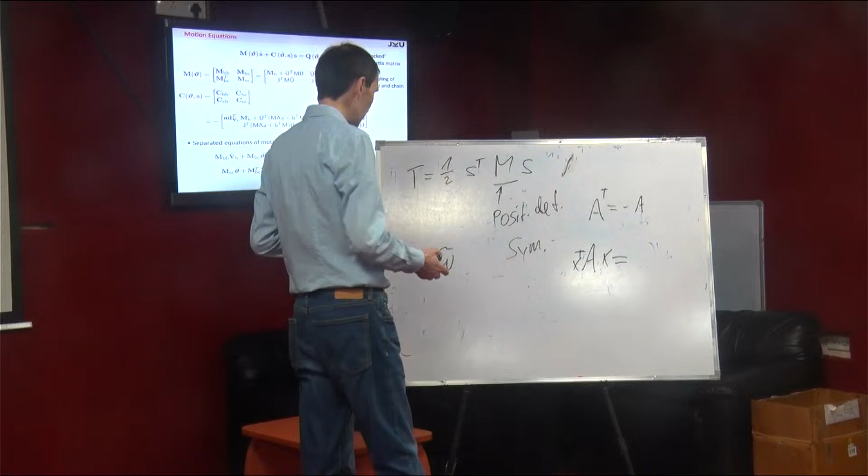Just to follow up: a special case, when we have this omega tilde, we said this is a skew symmetric matrix that we construct from omega. Anyway, the skew symmetric matrix. What do you know if you multiply this with X and X transpose from the left? Just as an example, like this 3x3 example, 3-dimensional example. What do you know, what is this? It's the cross product of omega and X, right, this is what you said.

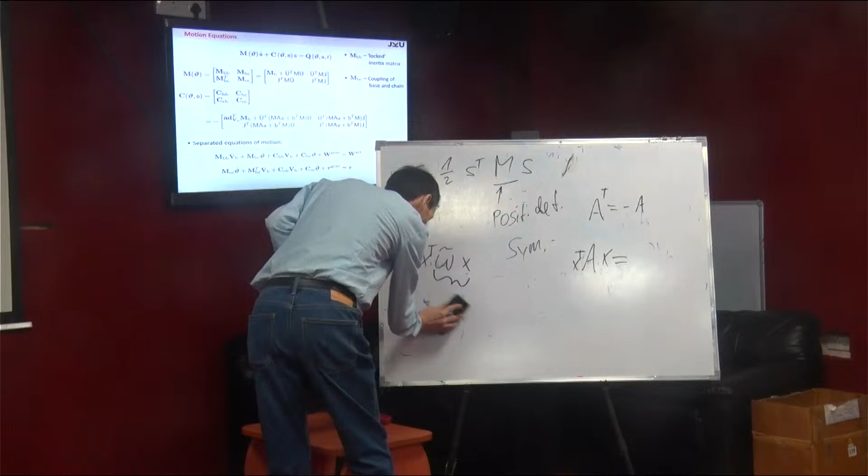Now, if this is the cross product of X... I shouldn't have used X actually. So X cross X, oh sorry, omega cross X, this is how you did it before. And now you take the scalar product of this with X. What do you get? So you take any vector, cross product with X, and then you multiply what comes out with X.

That is certainly a scalar, that's right, it's a scalar product. You take a vector omega, cross product X, what comes out is, of course, a vector which is orthogonal to X. And now, what's then about the scalar product? So you multiply a vector that is orthogonal to X with X. Correct, it's 0. So that's just a special case, and you can show, just write it out, just make an example, and you'll see that whenever A is, for example, skew symmetric, this is identically 0, always. And that's why this shouldn't be 0, shouldn't be skew symmetric.

Okay, this is where we left. I think this is where we stopped. No, where did we stop? I don't know, somewhere. Yeah, that's where we stopped. So the question with the coupling, is it answered?

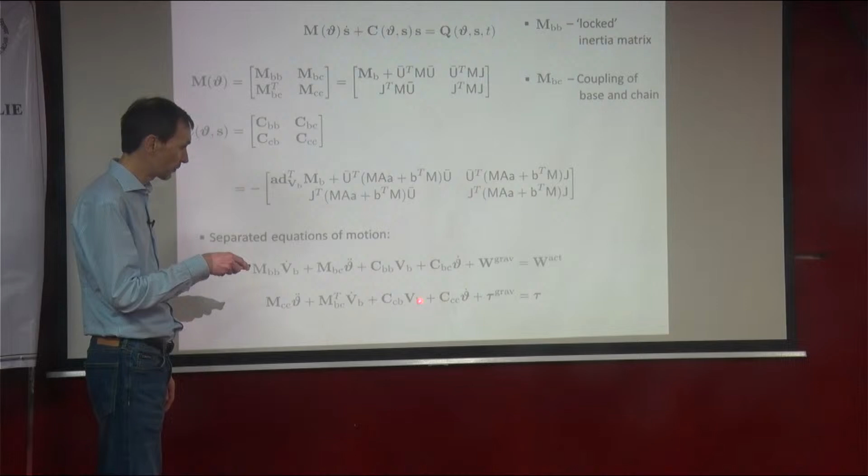Exactly, and you see this, maybe. Again, if you say the special case, the base is not moving, so this is 0, this is 0. And the only thing left is this term and this term. And this is exactly the motion equations of the kinematic chain when it's not moving.

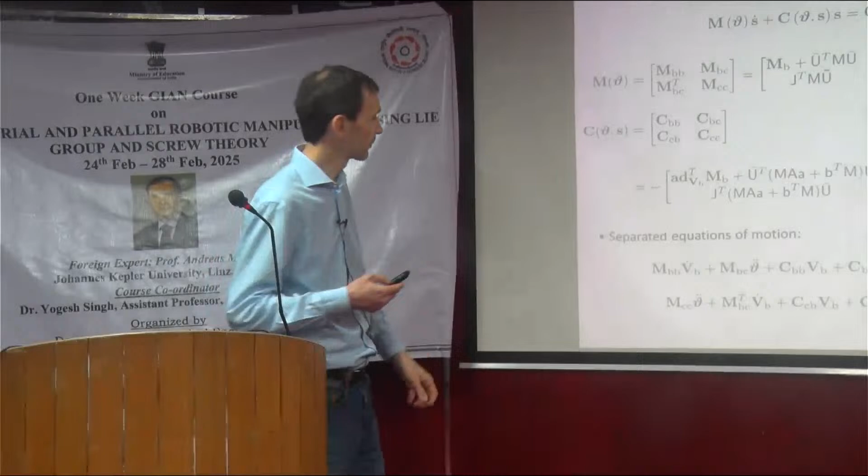How do you measure all these parameters physically? Which one? All of the measurements are calculated mathematically.

Yeah, that's a good point. I would like to show you some examples, maybe in the afternoon.

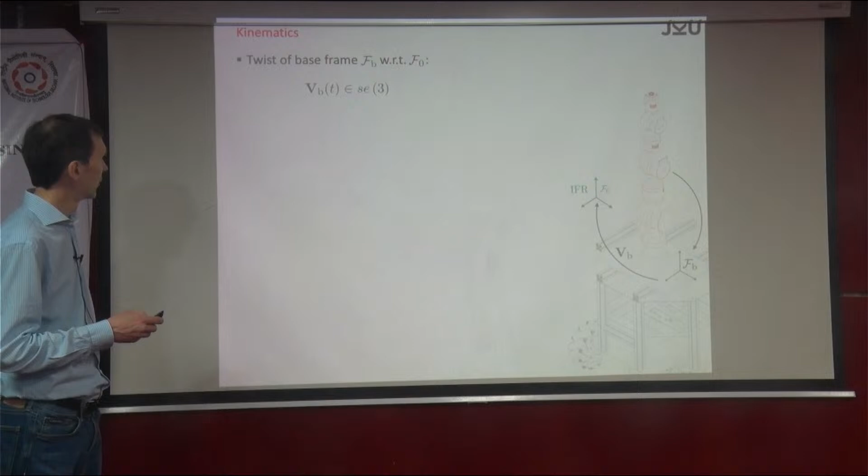So the question was, how do we measure this physically? So the question is, what do you mean by measuring? Maybe just to repeat again, what goes into the equation? No, I'm lost actually, I'm not sure. I don't know, somewhere. So what goes into the equation?

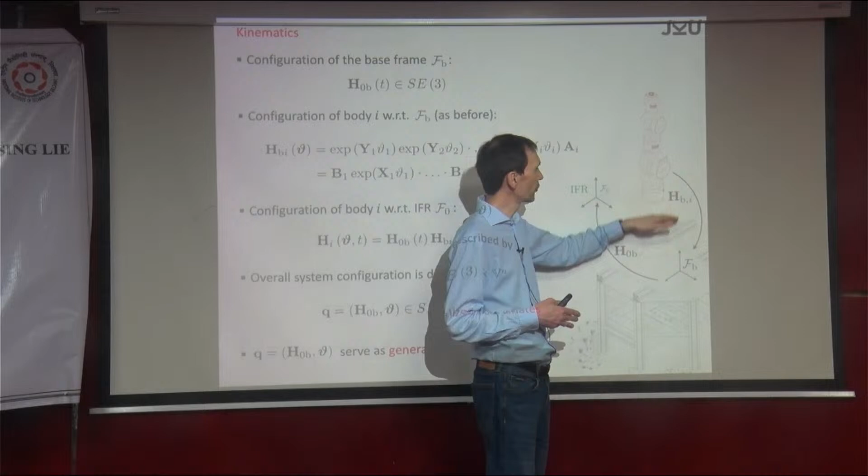Maybe start from the kinematics. What do you have to do? You have to, first of all, find the screw coordinates of the joints. This is easy to do because you just need to measure the vectors of the joint axis, and that's it. This goes into x, or y, depending what you want to do. So that's the kinematics, that's kind of easily done, really easily done.

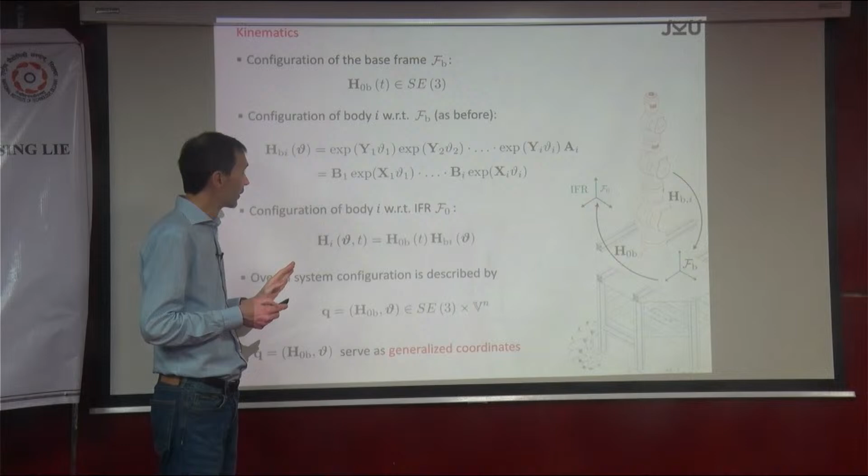So what's next? Dynamics. For the dynamics, where's dynamics, you need the mass matrices, and this is what we did yesterday. So the mass matrices, you need the mass of each body, and you need the moments of inertia, which is the inertia tensor, theta, we call it, or sometimes we call it J or I. And that's it. Of course you have to find this from, I don't know where.

You have to compute this. I mean, you have your links of your system, and then you have to identify the mass parameters and the inertia moments. If you have a CAD system, then you get it from a CAD system. Otherwise, that's always the thing. When you have a body and you have your links, you have to somehow measure them. And this is what you meant?

No. Yeah, so this is it. By the way, there are methods for identification of dynamic parameters, right? What would be a good idea to identify, or what could you imagine how to identify, for example?

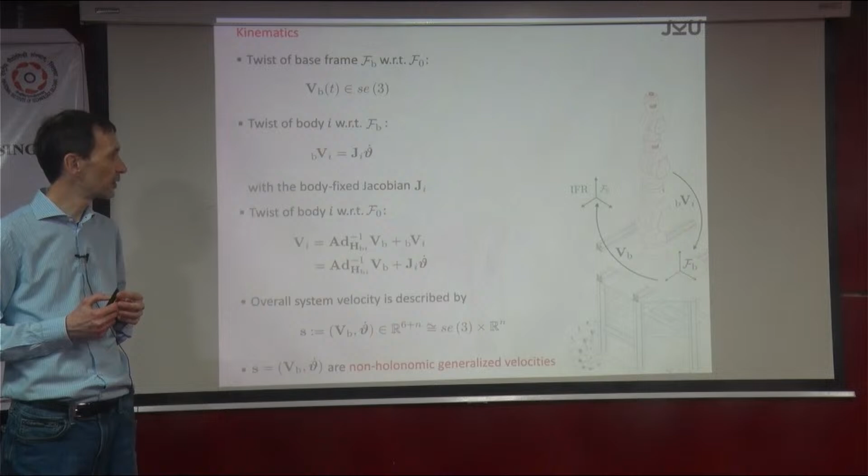I would like to know the mass and inertia of the links. So let's say you buy your robot, right, and you cannot disassemble it and weigh it, so that's not possible. But I still want to identify those parameters. How could you possibly do this?

So good point, what can you measure actually? Dimension, yeah. No, you have your control system. You have your robot, and you can do motion planning, right? You say go from there to there, and somehow it does it. So from your control system, what quantities can you access? The speed, the rotation angles, the speed of your joints. What else?

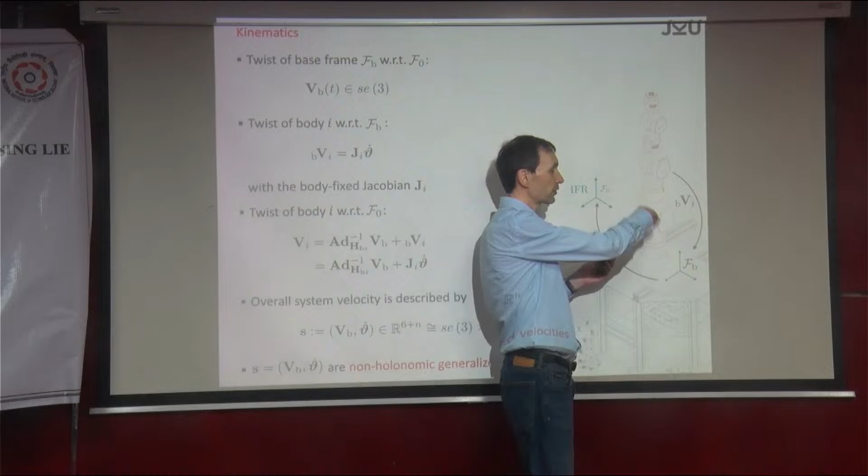Yeah, and that's the thing. It's not always easy to get, but you get the torque. What you most of the time really get is the current, the motor current, and that is somehow related, usually linearly by some motor constant or whatever, to the torque. So let's assume, and that is the case for most robots, that you can measure the torque. When I say the torque, I mean the drive torque. So you actuate your rods, and then you get it. Now intuitively it should be clear that the torque you need to move the system has to do with the mass and so on.

And now there is a whole business about this dynamic identification, in a sense that you generate trajectories that are called persistent excitation trajectories. Because what you want to do, you want to see.

To see, in a sense, you want to feel in your motor current the effect of the inertia, right? I mean, simply saying that, I don't know, look at the last one.

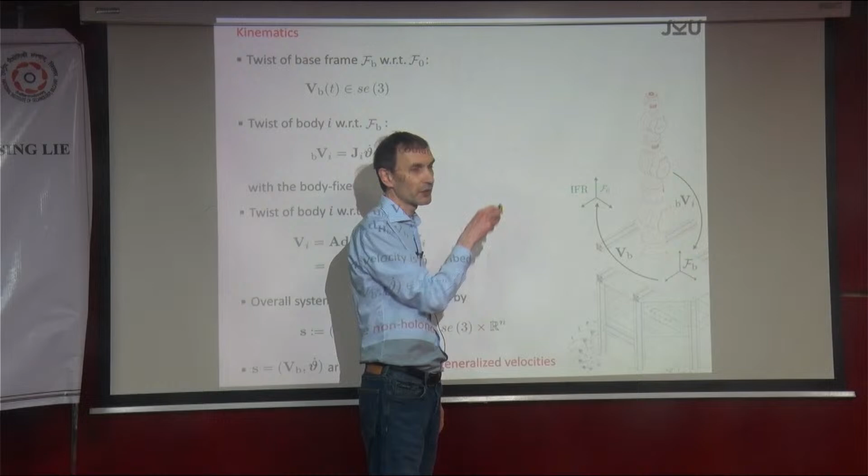So the last one, let's say you are rotating about this axis, and only the last one. What you're probably able to get is the mass and inertia, and maybe even the center of mass of the last link, because if you're turning here, the torque you need is certainly related to the mass and inertia of this last link. Now if you do the same for this one, or this one, then it's a mixture, because you have the effect of that inertia, this inertia, and this inertia.

But you can do this in a very nice way by using a linear regression to identify all this. There's lots of work on this, but it's actually not too difficult to do.

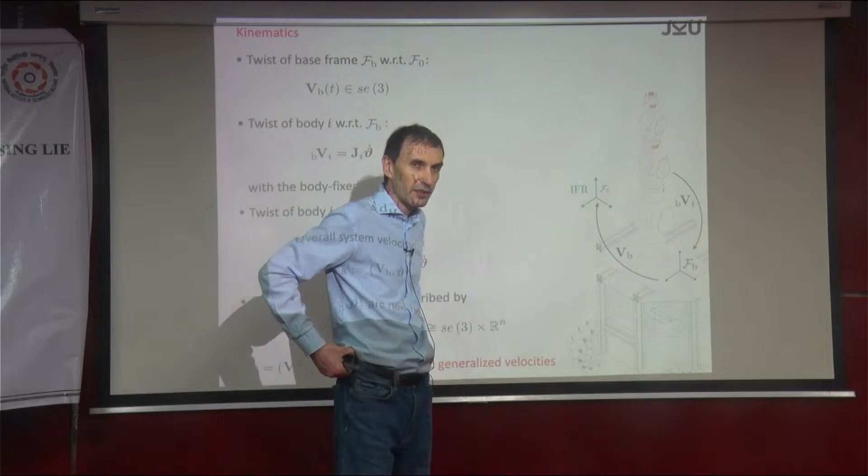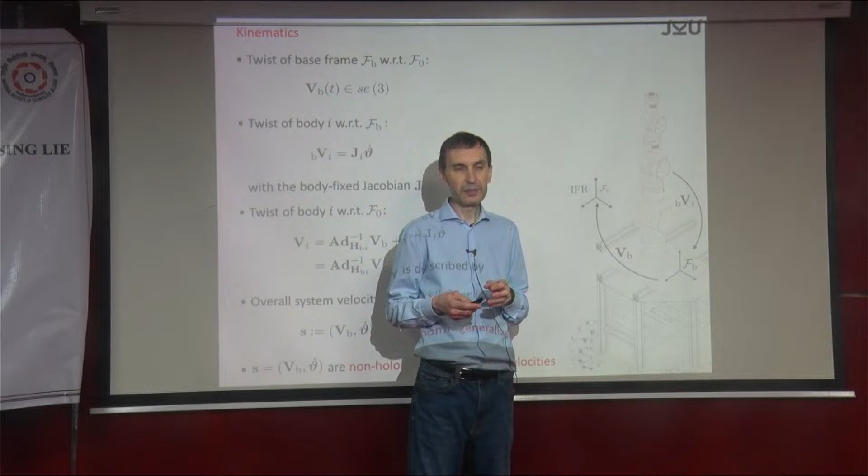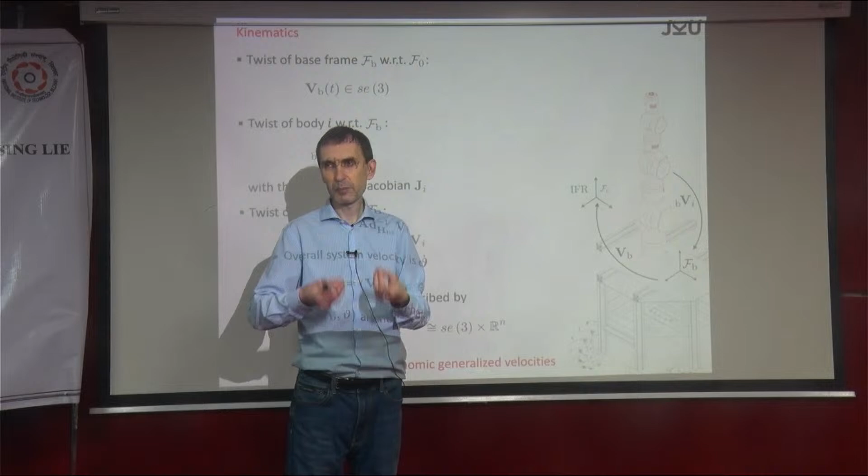What you have to do is find, as I was saying, you rotate here and then here - but how do you do this? This is why you have to find so-called persistent excitation trajectories, like motions, somehow crazy motions of the robot, that are exciting the dynamic parameters. A kind of stupid way of trying to identify the mass of this system is by rotating about this axis, because you get nothing out of it. If I would like to identify the dynamics parameters of this last link and I rotate about the vertical axis, you don't get much - you get something, the inertia about this axis, but it's almost invisible because the rest is too heavy.

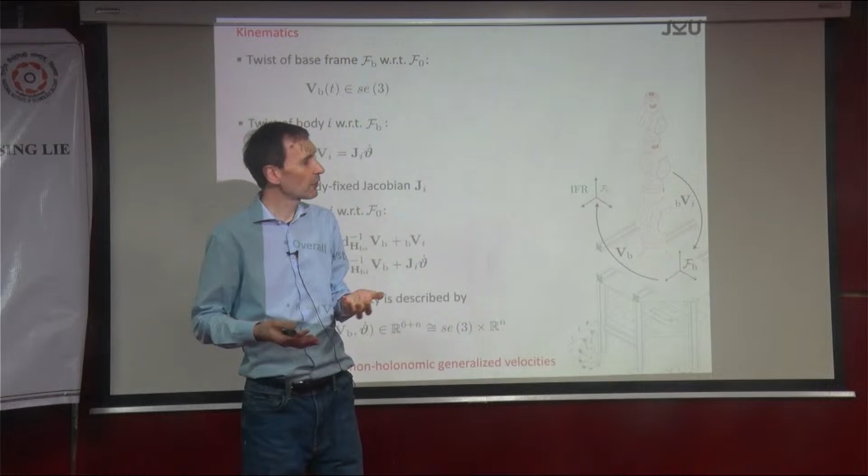So you have to find certain trajectories, motions, that are such that the motor currents - that means the torques - are influenced by the dynamic parameters of the system.

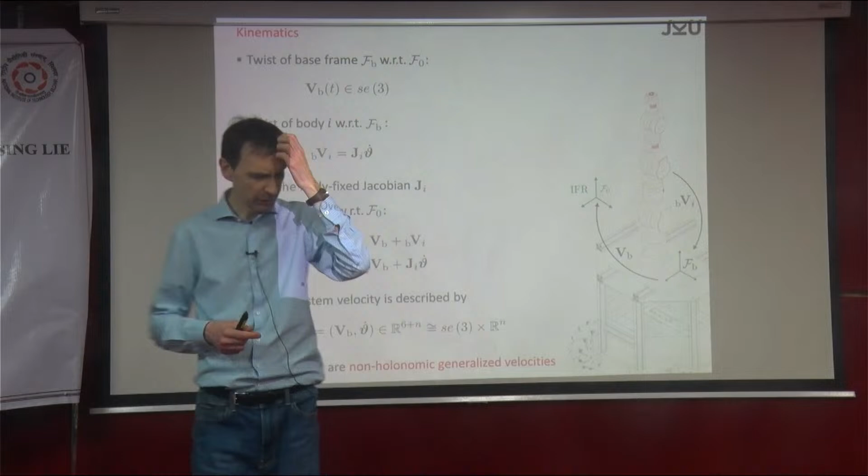Yeah, but that's not our topic. Okay, this was the dynamic parameters, which go somewhere here, right? So these are the dynamic parameters. And the rest is just computation - forming these matrices, and the matrices again.

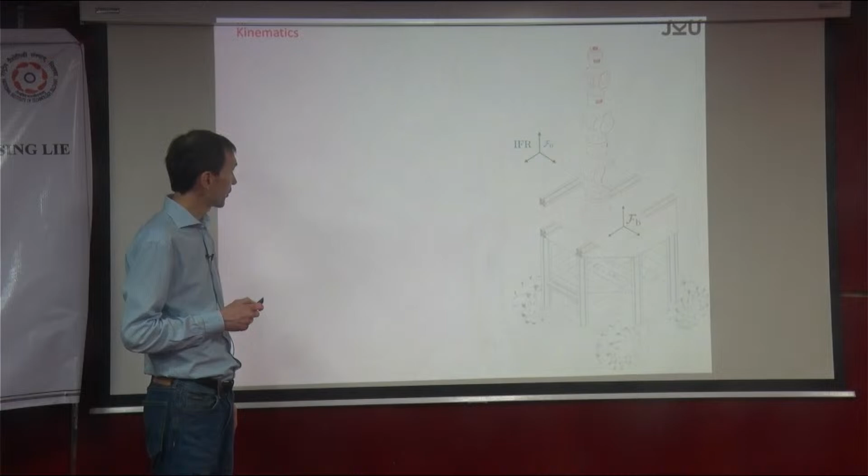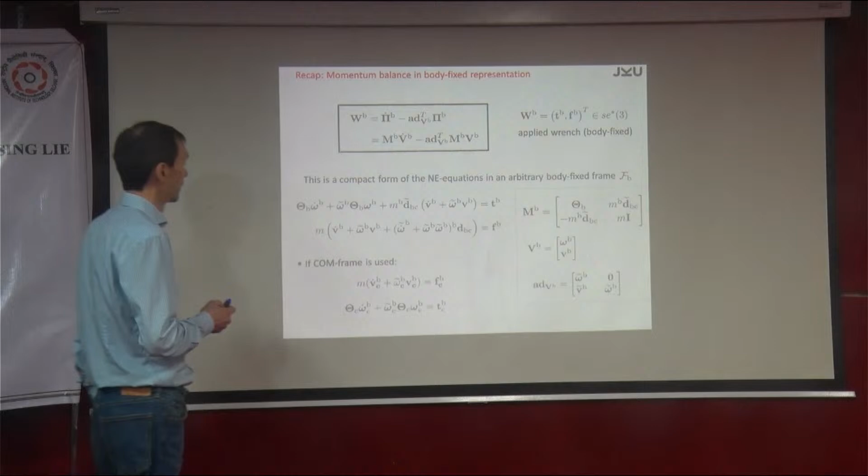Do we have it here on the slide? No, it's all from yesterday. I'm not sure if I should repeat it, but I can maybe go here, because this is what we did yesterday. There we go. Yeah, and then you form these matrices here, right?

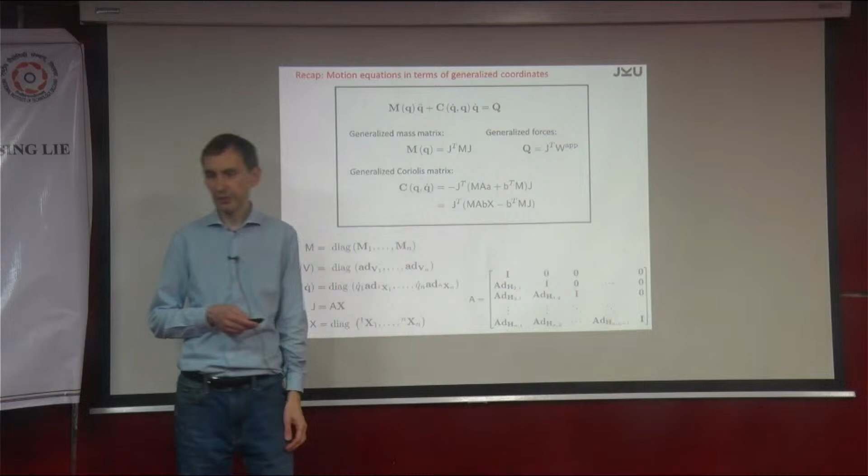And that's more implementation, not measurement. And that's it, actually. I'm not sure if I answered the question - I'm sure I didn't. Is this somehow what you wanted to know? No?

So what was the question? How can I measure this parameter experimentally? Which one? The inertia parameter, or the centrifugal parameter, damping parameter, and others.

Okay, so it's about dynamic identification - how can you physically measure this or that parameter? So the question is, how do you measure the mass of the system, of the links, possibly friction and damping of the joints?

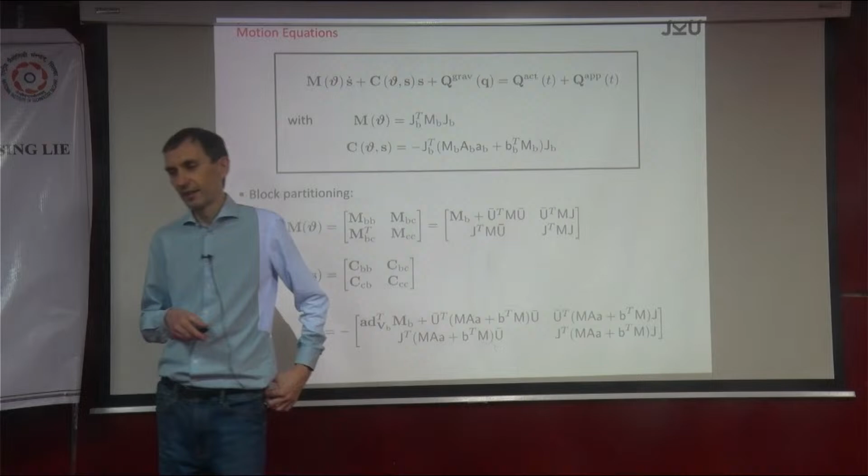Yeah, that's a totally different topic. As I was saying, the dynamic parameters you get by using these persistent excitations. For the stiffness and damping of the joints, this is a different approach. What you do is a frequency domain identification.

So what you do is, okay, you have this robot picture in mind. You give certain sweeps, like the motor torque, a certain kind of excitation with a certain frequency. And then you measure the end effector.

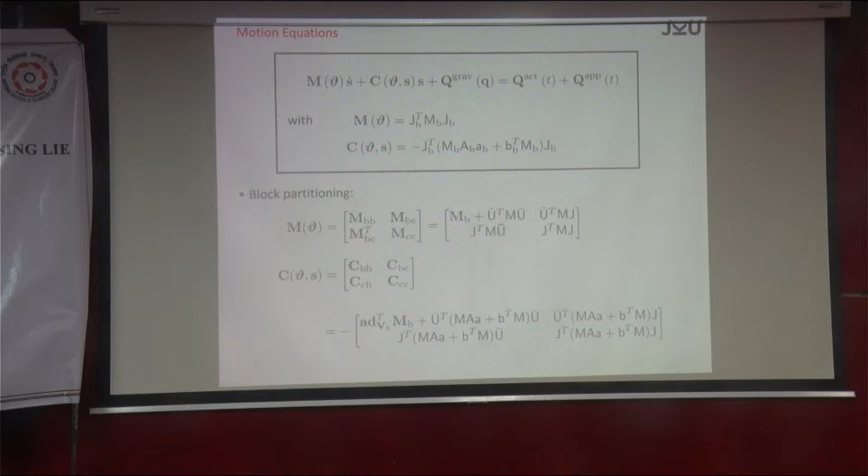And then you have a linear transmission channel, and from this you identify - what's the term, what's the term in English - the transfer function, now I have it, the transfer function. And from this you identify a model that comprises your...

So essentially what you do, you say we have a mass-spring-damper model for the joint and the links, and then, very simply speaking, you fit the transfer function - or let's say the frequency response - to this model, no, the other way around, the model to the frequency response. Of course this depends on the pose, because when the robot is positioned differently, it changes the transmission function, since it's a nonlinear transmission function. That's why you have to do this again in different poses.

There's a lot of things I could tell you, but maybe not now. So the message is there's lots of stuff there - I can send you some papers if you want.

Yeah, that was not a good idea to say linear.

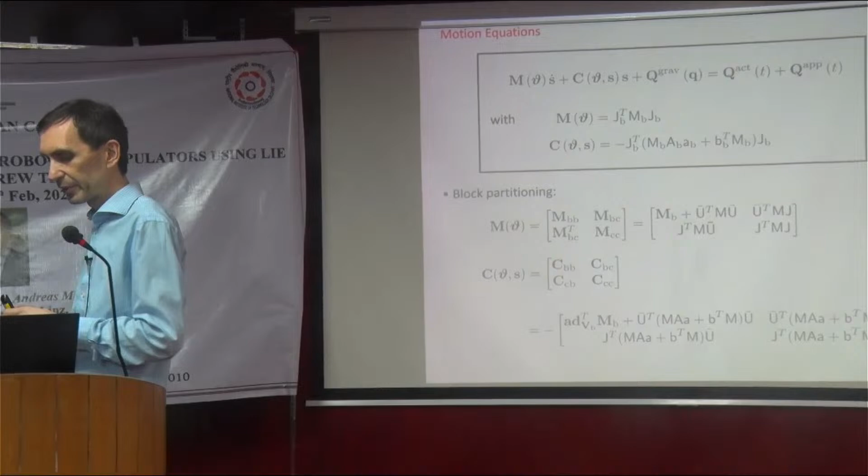So what you do, you have this robot, a certain robotic chain, kinematic chain. You do each of the joints, give it a certain frequency excitation, and then you change the frequency, so you have like a sweep. But you have to be very careful what kind of frequencies, what kind of excitations to use, because you want to avoid nonlinear effects.

Different topic. Anyway, you measure at the end effector what comes out, and what you get is an input-output relation. By assuming that the damping, friction, and stiffnesses are linear, which makes sense, you get a transfer function, and from this you get a frequency response. From this frequency response, you identify a linear model that comprises your stiffnesses, your damping, and that's it.

Because the mass, the inertia parameters, you have identified before. The chain is like, first of all, you have to calibrate your system. Calibrate means geometrically calibrate, just to know that you are exactly at the pose where you want to be. Second, you have to do the dynamic identification, so you do this persistent excitation, high-speed motions, and then measure the torques, and identify the mass and inertia. Once you have all the inertias, then you can go and identify stiffness and damping.

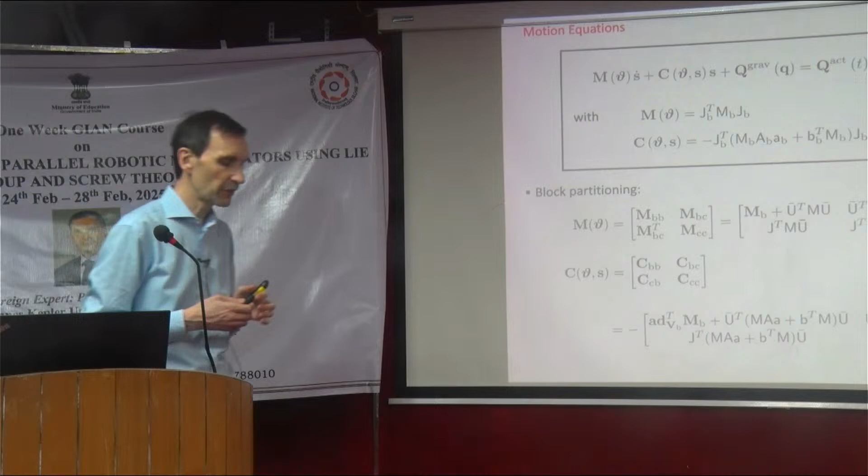And there are many things to consider, because if you just use random sine functions, or a chirp function where you increase the frequency, you have to be very careful, because then you're exciting nonlinear effects, and that's not what you want. That's why they use what's called odd random phase sine functions. So you have a sine function with a certain frequency, plus a phase offset, and the phase is random.

We could talk about this. There are lots of papers on it.

Yeah, it's absolutely right. This is a very important thing, because in the end, at the beginning even, you need the parameters. If you have no parameters, you can forget all the models. That's why it's model identification. Generally what you do is modeling, then model identification, and then model-based control.

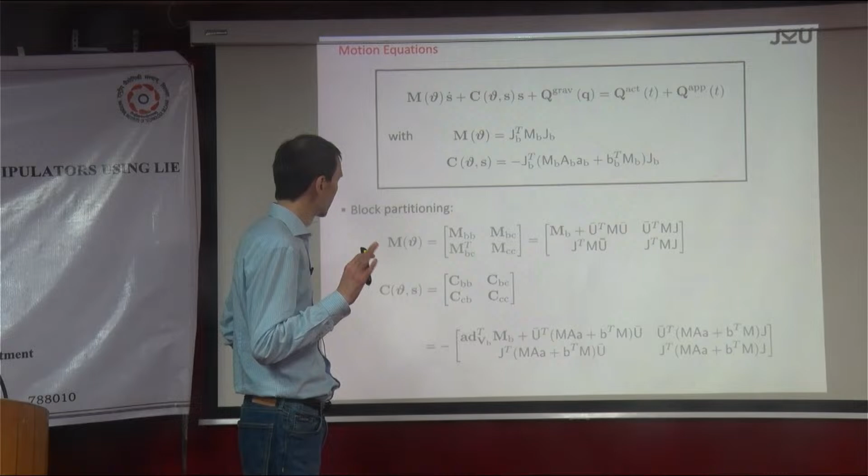Did we finish this, or did we? I'm not sure. Yeah, so that's okay, right? Okay, good. Maybe we should not spend so much time on this. Yes, okay, good.

Maybe just to finish this one. I was saying there are two extremes. One is, for example, the base is not moving, and just the robot is moving. If the base is not moving, then we have this equation, for example. I guess I have it also as the next slide. Yeah, exactly.

Here, if the base is not moving, for example, then this is 0, and this is 0, and this is 0. So these are the two equations, one for the base and one for the arm. If the base is not moving, this goes away, and we are left with this and that, with these coupling matrices.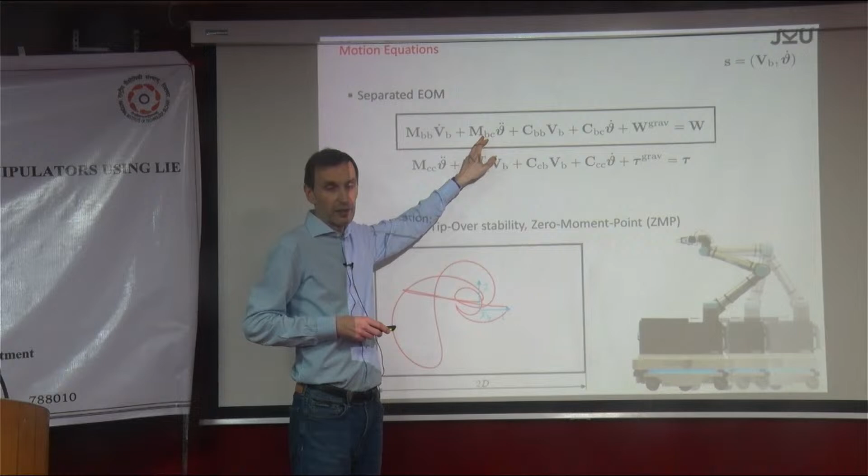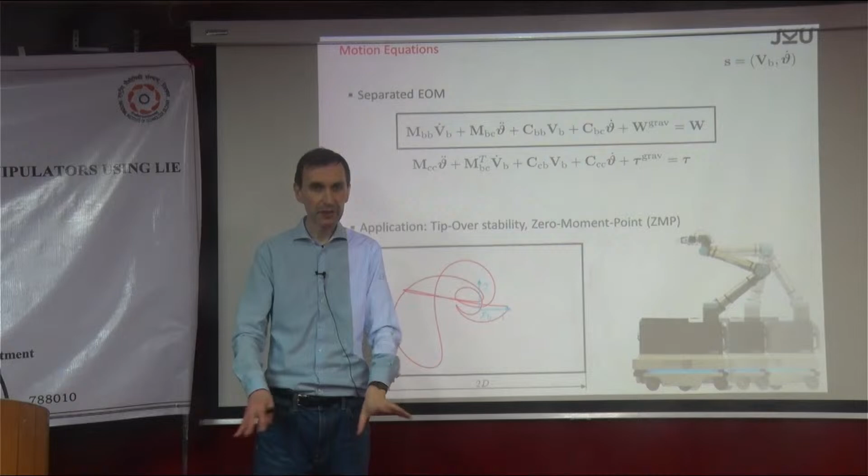And what do you get then? You get the wrench at the base because of the motion of the robot. That's exactly what I mentioned, because we talked about momentum, but this is about the wrench actually. This gives you the wrench, the torque and the force, at gravity. What you get then is the wrench, the force and the torque, at the foundation of your robot, and that's an important, interesting thing. Normally when you have an industrial robot, you mount it strongly and nobody really cares, but you have to care about how much load you're actually introducing into the foundation, and vibrations and so on.

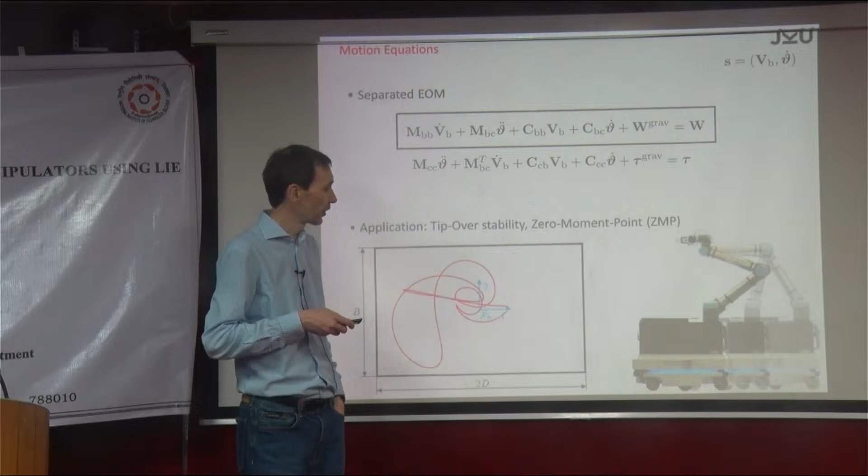But for mobile robotics, it's even more interesting because you need to know that your system is not falling over. If you do high speed motion and the whole thing tips over, that's not a good idea. That's why you have to do this model base, because otherwise there's no way to do it. What you have to identify is somehow the load. If you have a mobile system like this with wheels, you could look at the forces at the wheels, for example. But what you get out here, first of all, is the wrench, and then you have to do something with that wrench.

Okay, let's say this is moving. This is a mobile platform, right? And there's a universal robot arm on top of it. And you move the robot arm. Then, and the base, let's say, is not moving.

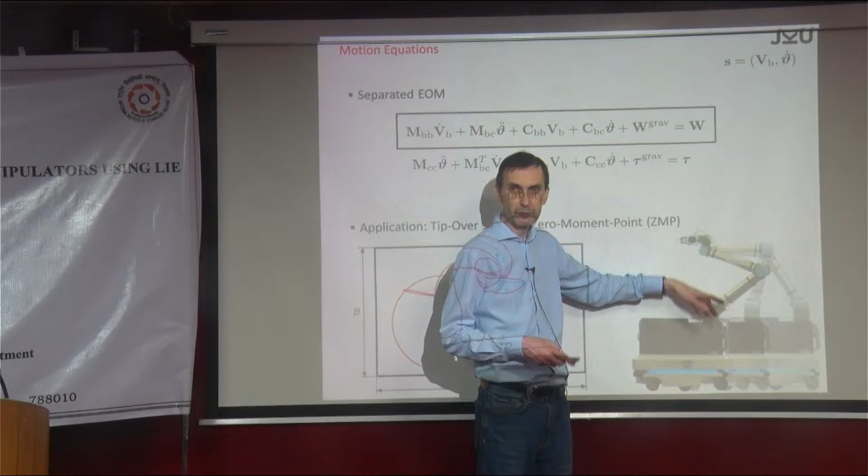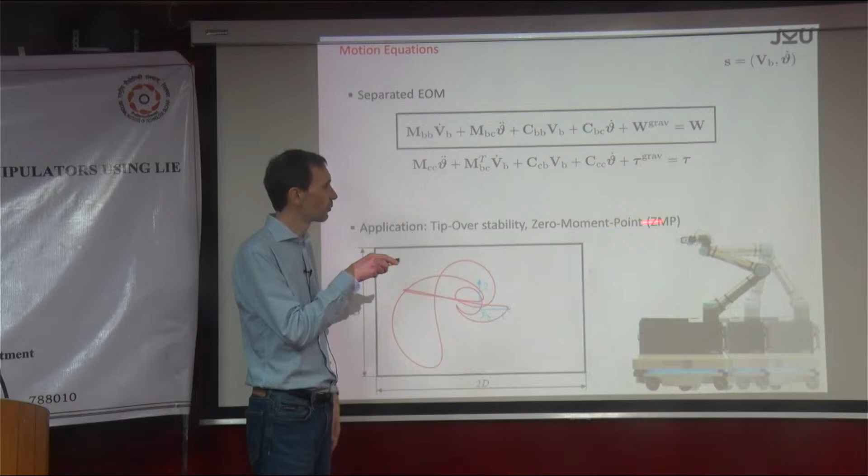And what you get from this equation is the torque and the force expressed in the base frame because of the motion, right? So what you have to make sure is that the so-called zero moment point is within the support polygon of the mobile system.

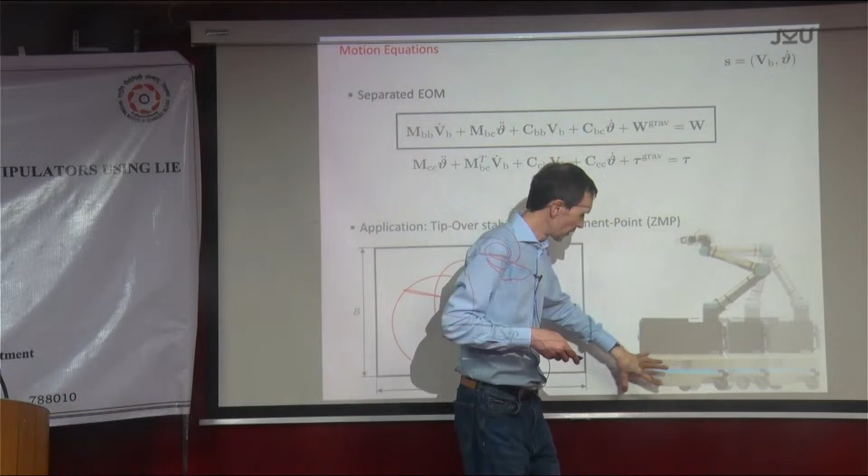Okay, what do I mean by this? So let's say you have a mobile system with wheels. So this is your top view or bottom view of this mobile platform. Now here you have one wheel, we have 4 wheels, right? This funny thing has actually 6 because there are driving wheels here. The other ones are just follower wheels.

And how do I know that the system is not tipping over, not falling? This has to do with this so-called ZMP, the zero moment point. This comes originally from biomechanics.

The question is, for example, when you are standing, or when you are walking, what's the condition for you not to fall over? Well, there is one kind of obvious argument: the center of mass should be somehow in the support polygon of my feet, right? And when you say support polygon, like these are my feet, it should be here somewhere in there, because otherwise I'm not able to stabilize something, which is not totally correct.

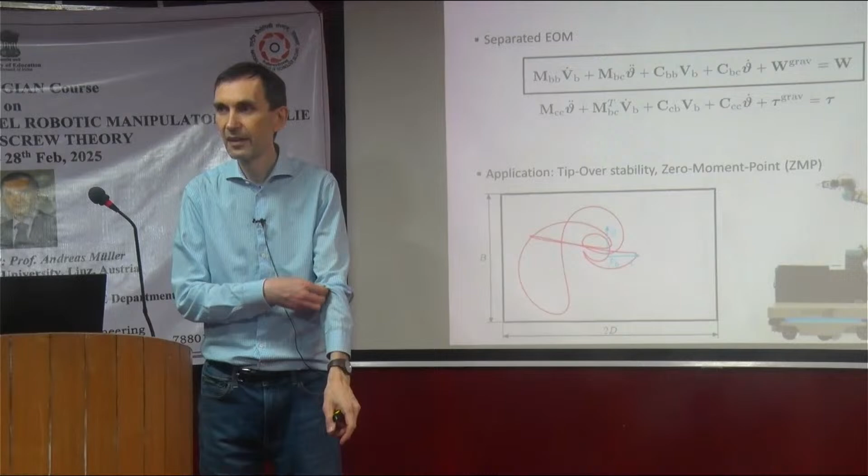The net torque must be 0. And there is exactly one point, which is called the zero moment point, right? So for each question, there is one point.

So I could determine the reaction force. When I'm standing here, I could determine the reaction force at a certain point. I have a frame somewhere on the ground, and then I can measure the torque and the force because of me standing here. There's a torque and a force, a moment and a force, which is called a wrench. But there's one point where this is reduced to a single force.

Sometimes you have the feeling like it's in the middle, maybe not. So I bend a bit, and this is somewhere here. And exactly this, because if this point where your reaction torque is reduced to a pure force is... I don't know what I want to say. Anyway, so if this reaction torque is reduced to a pure force...

There's always a point where this reaction force reduces to a pure force. The question is: is this within the support polygon or outside? If it is inside, then it's stable. If it is outside, like sometimes here, then I can't stabilize myself, right? And this is generally true.

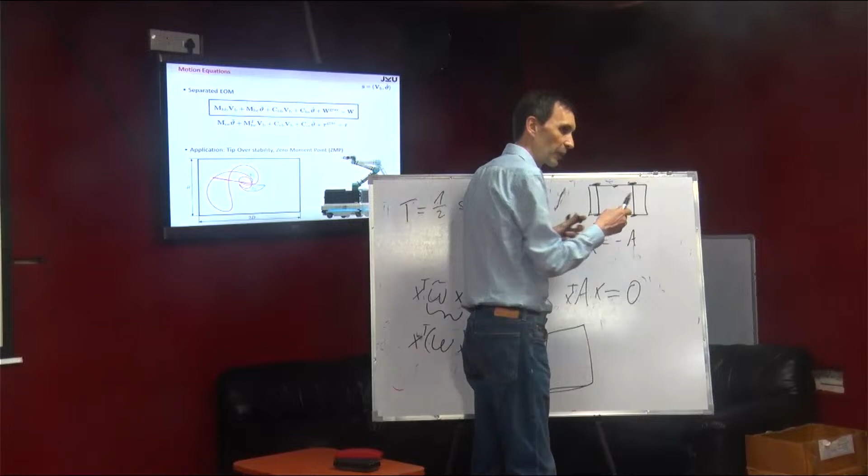And you do the same, of course, for the mobile system. So the support polygon would be defined by the wheels, right? Because the wheels are the things that stabilize it. But you can also have like a table or stuff like this. And this is what we have here. There are formulas for computing it. This is very simple, but anyway, not shown here.

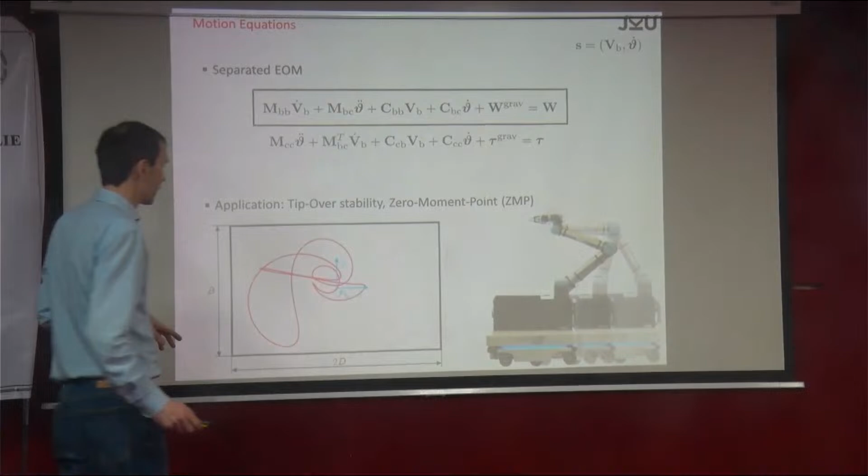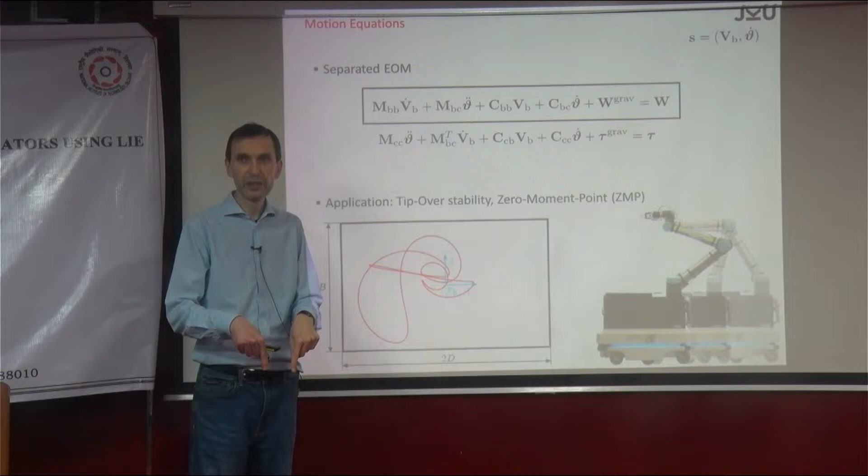And if you do, like, this is what we did for this system. This was an Austrian research project. I don't know what the motion was, a high-speed motion, and then you get whatever you get. So the good thing is this is the trajectory of the zero moment point, and apparently it's all the time within this support polygon.

And this is, of course, including the full dynamics, right? What you said with the center of mass is more like a static consideration.

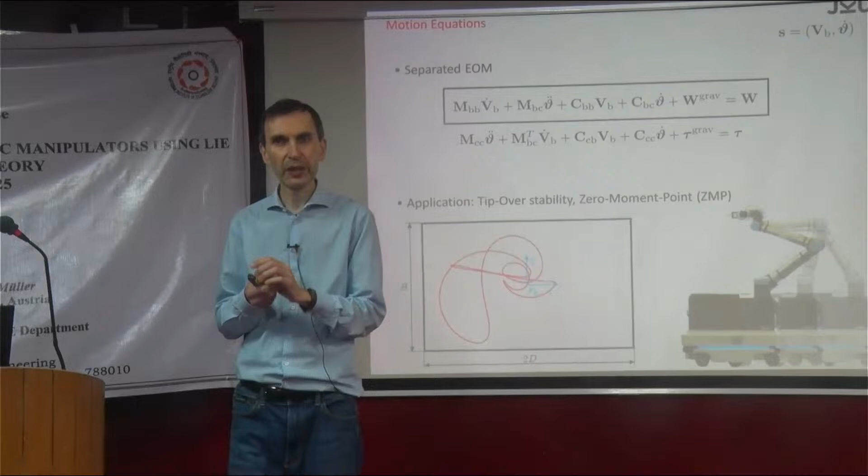Okay. Yep. Okay, good. Not sure. Yeah, Yogesh is not here.

We could also look into the second equation.

So these are the motion equations, the coupled motion equations for the base, and this is for the joints.

What you could ask here is a special case of the joint not moving, like the system is locked. This is interesting when you have systems mounted somewhere, so you'd like to stabilize your robot while the robot itself is moving somewhere. There are many applications, like on a vessel, where the vessel is doing this but the robot should be fixed.

In space it's also important. No, in space, no, it's anyway. There are applications for this.

You get this out by looking at the special case again, and we always look at this cross coupling. So when the robot is not moving, the joints are locked, then this term goes away and that goes away, and we're left with this one.

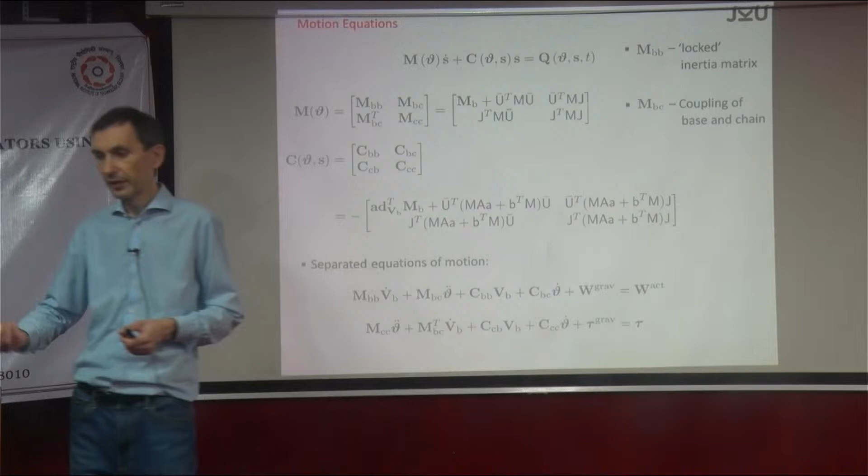So what it gives you are the joint torques, the torques you need to hold the system as it is when the base is doing a motion with the base twist VB. Because when I say locked, I mean normally you have to hold them, control them still. This is the torque you need to hold it.

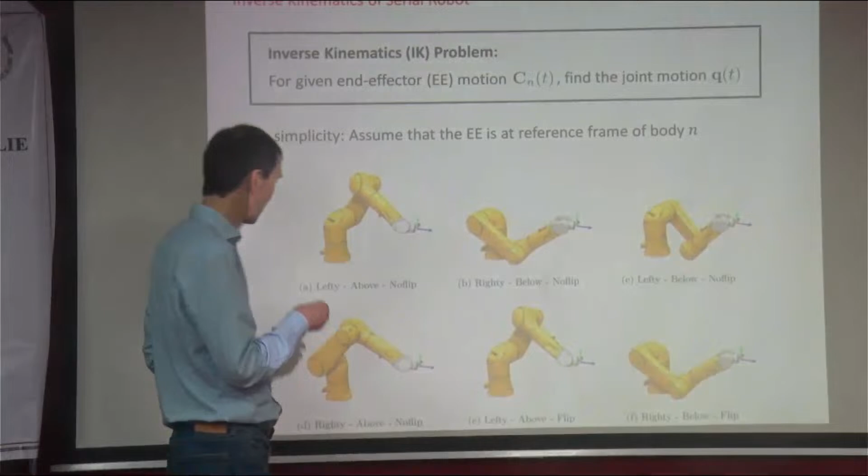So for some robots there are closed form solutions, for many there are no closed form solutions. For example, let's take this typical 6 degree of freedom robot. The inverse kinematics thing is it's not unique - meaning if I give you an end effector pose, you see it's all the same, but you get different inverse kinematic solutions for this. So the joint angles are totally different, but they're all admissible.

So which one do you like? Well, anyway this is not a question... yeah it looks good, yeah. Non-flip or flip? Where's flip? This one or that one?

In the end, it's not a good idea to just look at one picture, at one configuration, because your robot is doing a motion. When you are starting here, it might be a good idea to start there, because in the end the question is are you reaching a limit? The path is normally prescribed, so you might come to a point where the inverse kinematic solution does not exist, because it's simply too convoluted, so to say.

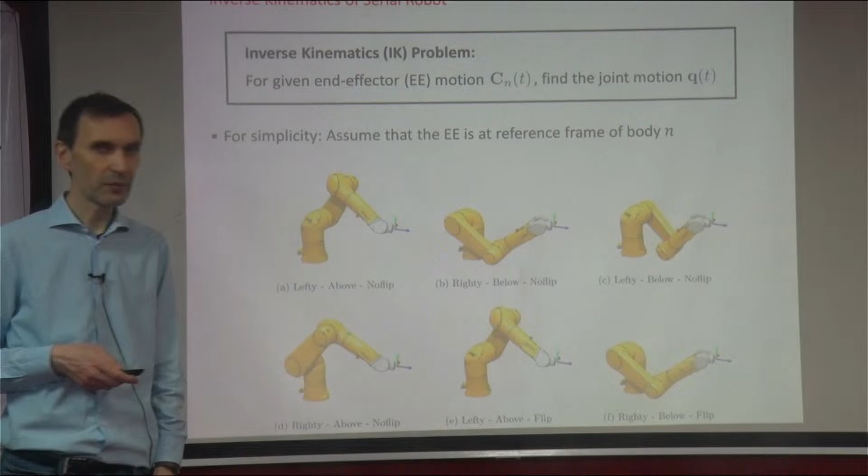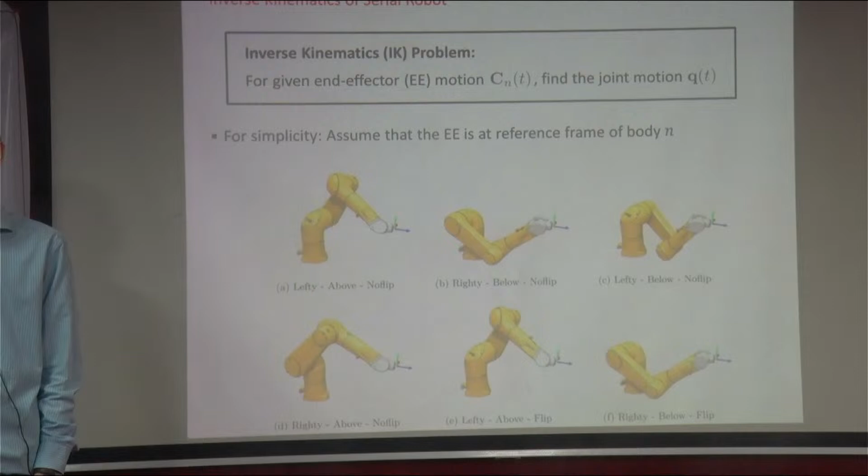Anyway, but how do you solve it? How do you find these inverse kinematic solutions? There were two good answers: one said numerically and one said explicitly. Do you have an explicit closed form solution for this? There is actually one. That was one of the important results some time ago.

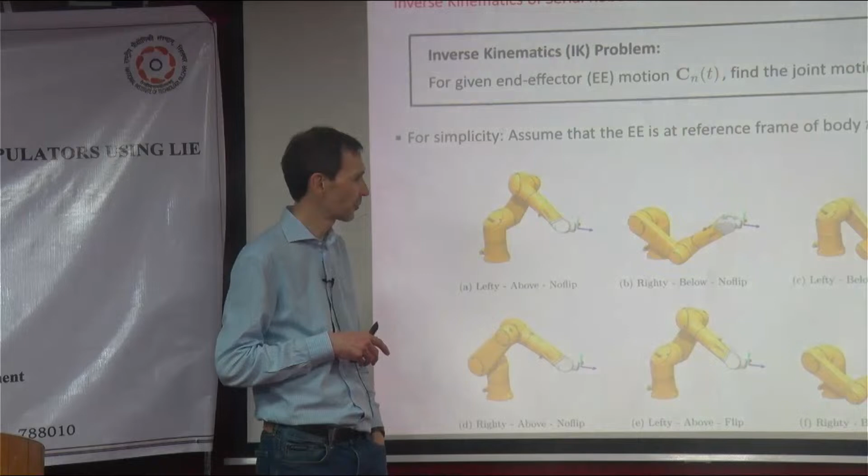This is again for these wrist-partitioned robots. You have 1, 2, 3 joints that do the positioning, and then you have what they call the wrist, like the human wrist, because the last 3 joints just do this orientation motion. For this system, there is a closed form solution for the inverse kinematics. But I have to say it's more like a closed form solution algorithm, because there are some ifs and thens in there. But anyway, it's there.

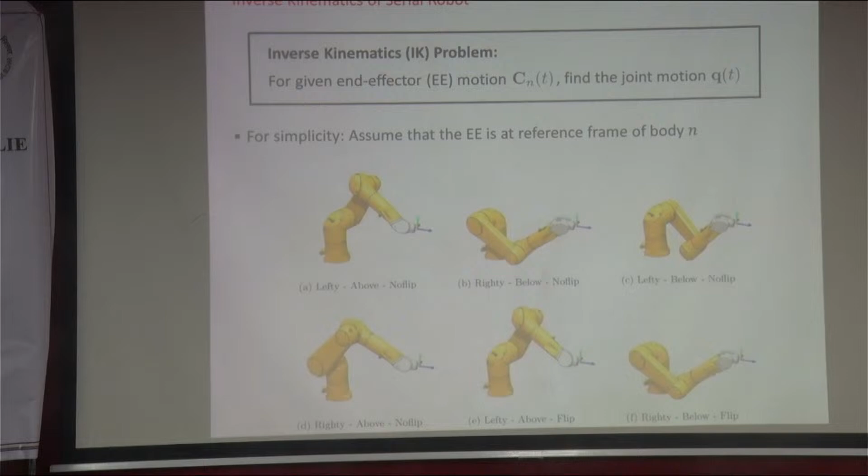Okay, good, what do I say here? I don't know what I'm saying. Let's say we have - I'm sorry, I still have this C, which was H - anyway, you have the homogeneous matrix that describes the end effector pose relative to the space fixed frame, and I would like to have the joint coordinates according to this motion.

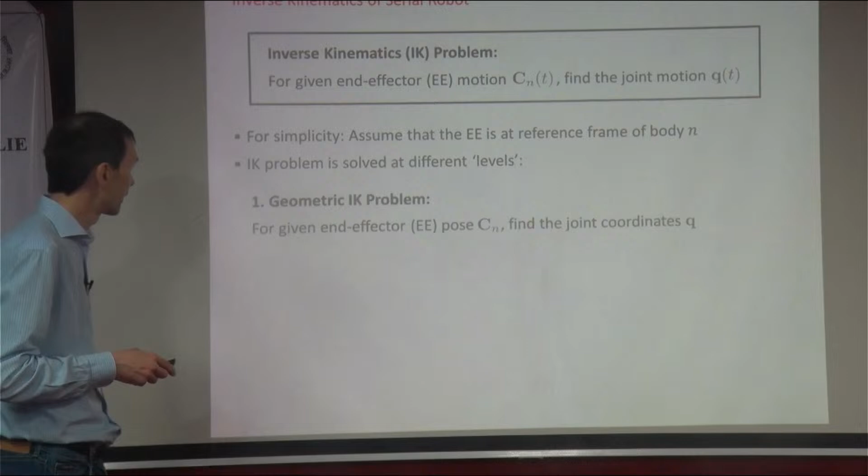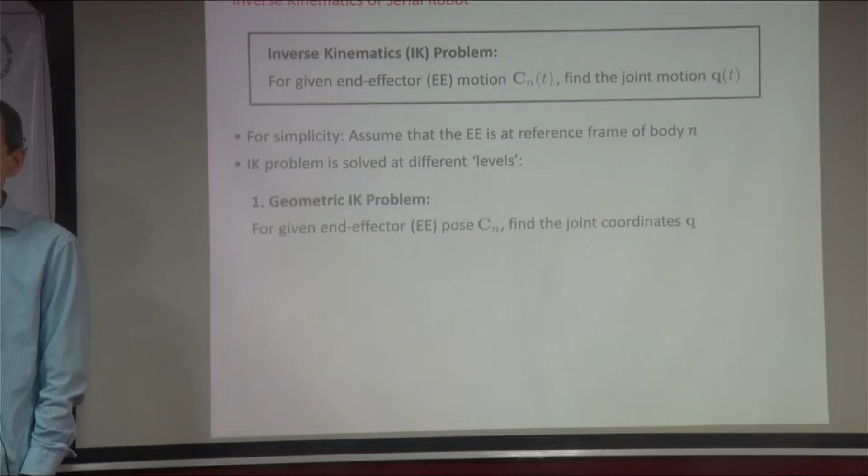We have different levels in the sense that we have the geometric inverse kinematic problem. We want to find the matrix C or H - for a given end effector pose, we would like to have the joint coordinate vector Q. That means we would like to find the inverse of that function, because the forward kinematics is given by the product of exponentials. Now the inverse kinematics is finding the inverse of that function, and that of course is generally not possible analytically.

The other thing is the velocity inverse kinematics problem. So given the twist of the end effector, I would like to find the joint velocities, which means we have to find the inverse of that relation. As we said on the very first day, this is doable if J, for example, is square and full rank. What if J is not square?

Exactly, then you take the pseudo inverse. What is it? Kinematically, what kind of robot do we have if it's non-square? So we have a redundant robot, they call it, right? For example, if that thing has 7 joints, let's say we have 7. Then we have a redundant robot because we have 6 output coordinates - the end effector has 6 coordinates, and we have 7 inputs.

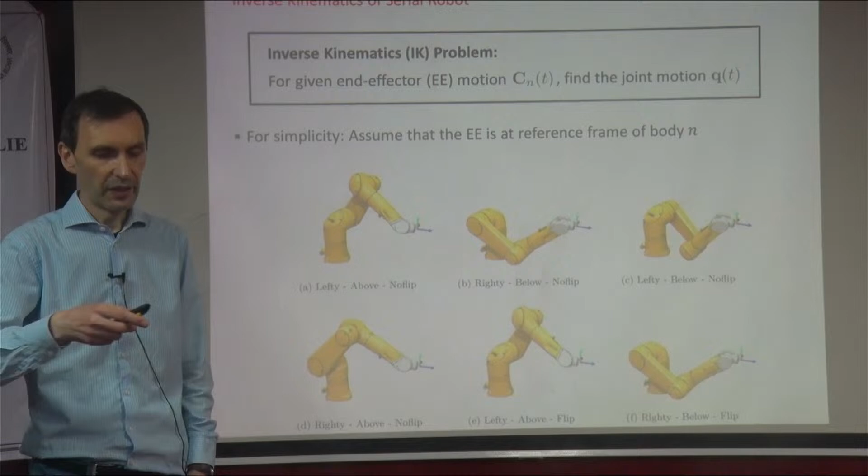And they call it, this was in this area of human robot interaction. They started using them for whatever reason, and they call it anthropomorphic arm. Anthropomorphic arm, like human, similar to humans. So what is the, how do we understand redundancy? What's the effect of redundancy?

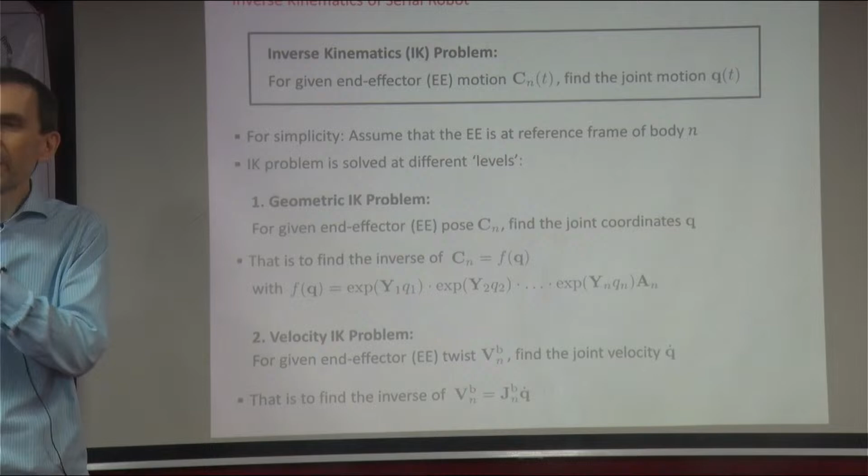You can plan tasks for instance, more than one solution. More than one solution. That's a good point. And use complex tasks, so they are helpful for whatever complex means. They are more dexterous, right? In a sense that you can avoid obstacles, for example.

So I mean, they call it anthropomorphic arm because it resembles the human arm. So the human arm, if you have a simplified model, how many degrees of freedom does your arm have? Forget about the fingers, of course. Now everybody counts. So how many do you have? Let's say we start here with the shoulder, and let's say we have a spherical joint, like a ball socket joint, which is not really true, but let's say. Well, then this makes 3, right?

So then we have one more, 4. Then we have that one, 5, and then we still have the wrist. How many? Yeah, the thing is, I already included this rotation, so we have 2 more left, which makes 7. So our arm has 1 degree of redundancy.

And how do you feel this? You're quite comfortable with your arm, I know. No, the thing is that, as you said, the inverse kinematic solution is not unique. And you see this by saying, what does it mean? It means that for a given end effector pose, you have multiple inverse kinematic solutions. And you can see this immediately. If you fix your hand, for example, you can still do motions, right? And this is the 1D motion, this 1 degree of freedom motion. Some are better, some are not so good. I'm not so good. So, and that's the important point, this is the important

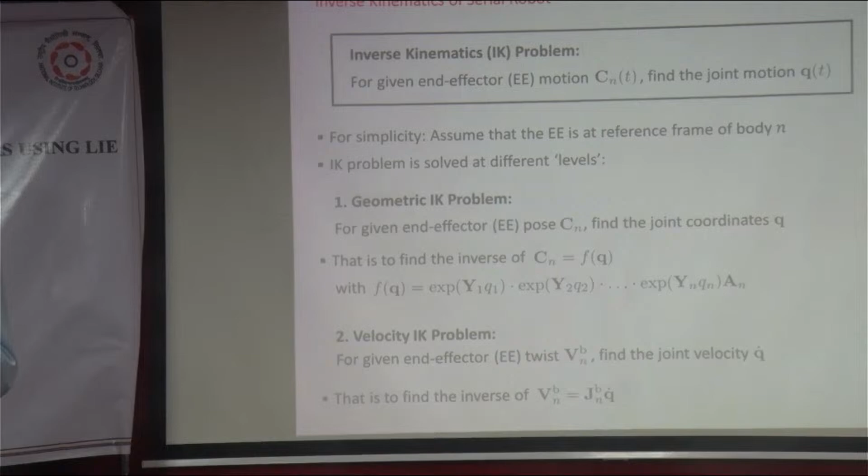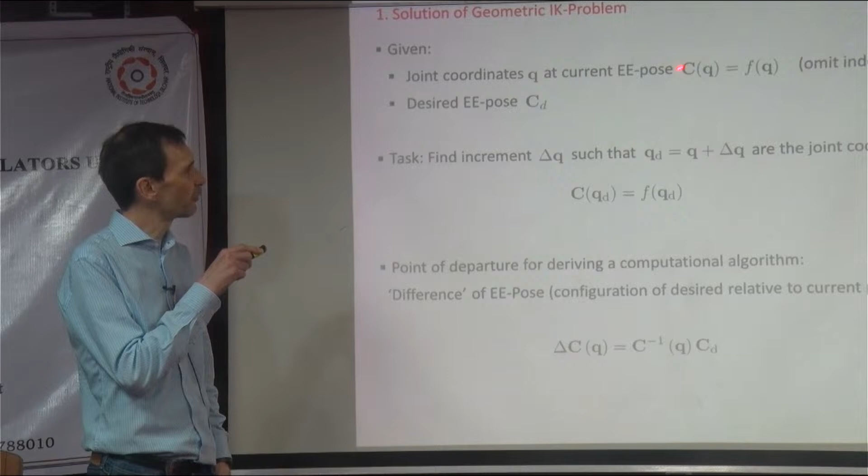Yeah, what about now the geometric inverse kinematic problem? So let's say we are given the end effector pose, given for example by our exponential mapping, f. So this is actually our forward kinematic mapping. So we have the exponential mapping that gives you C of Q, right? For any joint angles, you plug them in and you get your end effector motion, pose. Then I have one desired end effector pose. Let's call it CD, this homogeneous matrix, D for desired.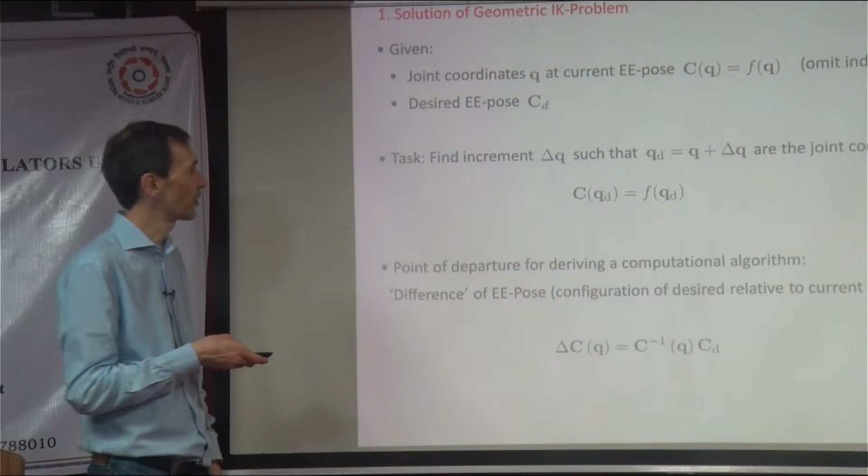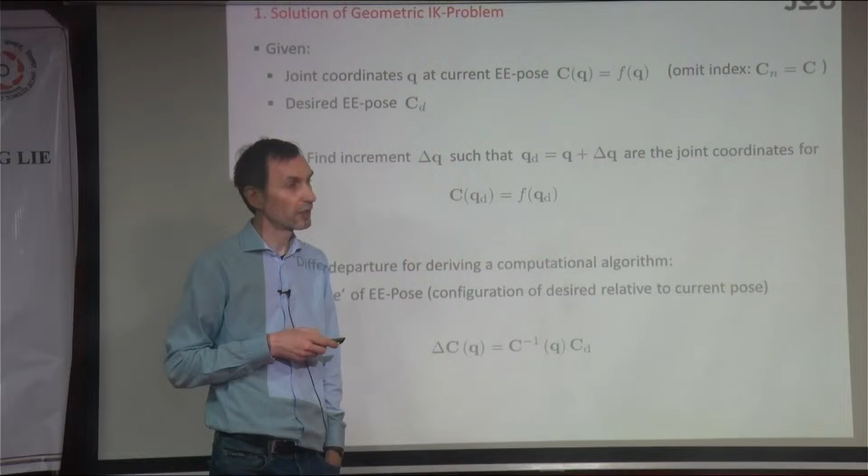So the task is to find, and you start somewhere, right? So let's say you start from some Q, maybe the 0 reference configuration, you start somewhere. Then, given this desired end effector pose, what I need to find is the solution of this. I need to find a QD, a joint coordinate vector, so that this is true, because that's what I need to achieve - that this is equal to CD, okay? And by starting somewhere, if I start somewhere, then there must be an offset so that I reach this point. So my yet unknown joint vector, QD, is the one I'm starting from plus some offset. Now the thing is how to find the offset. This is the big question.

Now the thing is we have to find an error. So how do we find an error of the end effector pose?

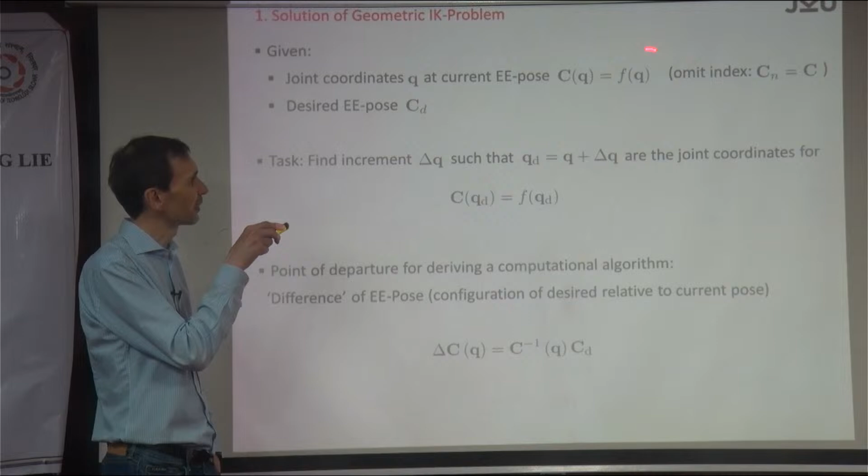So we have given this CD. This is where we want to be, the homogeneous matrix that we should achieve. And then I have my forward kinematic mapping, the exponential mapping, C of Q. That gives you also something. So we have CD and we have C of Q.

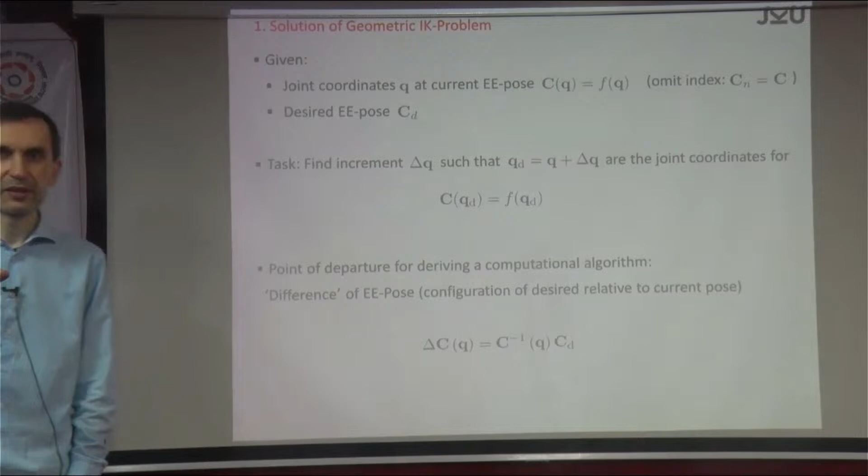How do I find an error? How much difference, how far am I away from the target? You said subtract. So like saying that I take CD, right? Stop. So CD minus C of Q. This is what you said. Okay, what did we say about these homogeneous matrices?

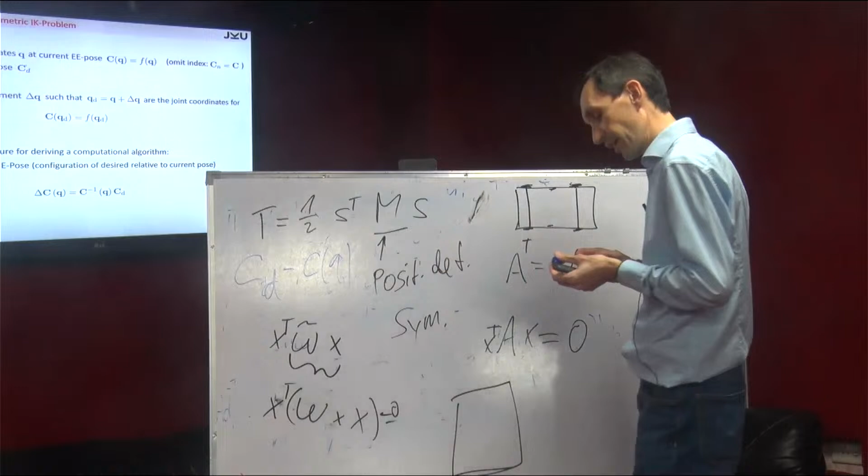We talked about this Lie group stuff, right? And we said they form a group and so on. Under what operation did they form a group? Under multiplication. And also, does it really make sense to subtract homogeneous matrices? Yes, they have the same dimension, but not everything that has the same dimension should be subtracted.

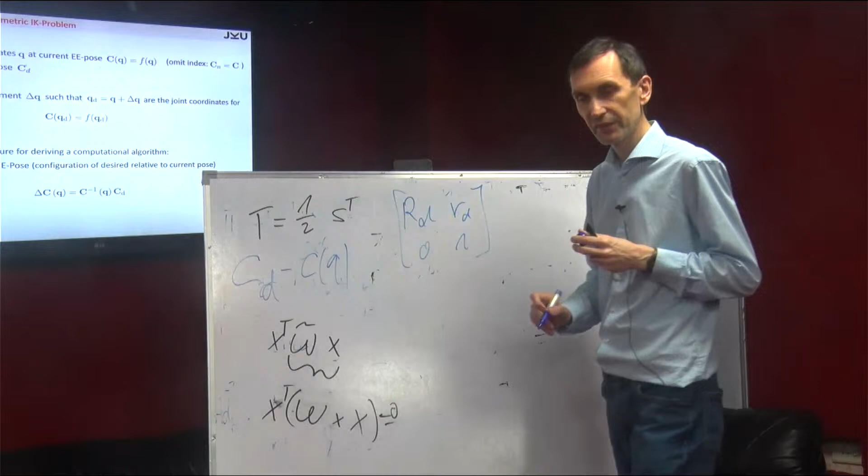Okay, so you have CD is like RD and little rd, 0, 1. So this is my CD, right? And then you say I subtract the current rotation matrix and position vector, and then I have this. So what I'm getting is RD minus R, and here I get RD minus r, here I get 0, 0. I mean, first of all, what you get out of this is not the homogeneous transformation matrix anymore. Why? Because there's 0, not 1.

And also, what I would like to know is, when I say error, I would like to know the relative displacement of my current end effector pose relative to the desired pose, or the other way around, doesn't matter. And how do I get to the relative displacement of two frames? Exactly, it's a transformation. So it's this one. So you take the inverse times CD, and then you get a proper homogeneous transformation matrix that describes a proper frame transformation.

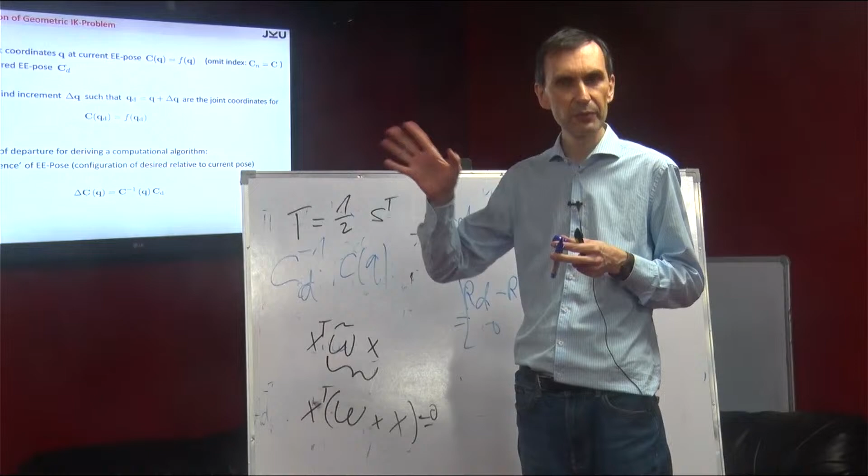So instead of using this, which is intuitively, I know it's so obvious to say, but you should do this. Yeah, or the other way around. It doesn't make a difference. So this gives you the relative configuration of one frame relative to the other, and that's what we should use. Because then you have a proper homogeneous matrix, and we can use this matrix to solve the inverse kinematics. Okay, and we call this delta C.

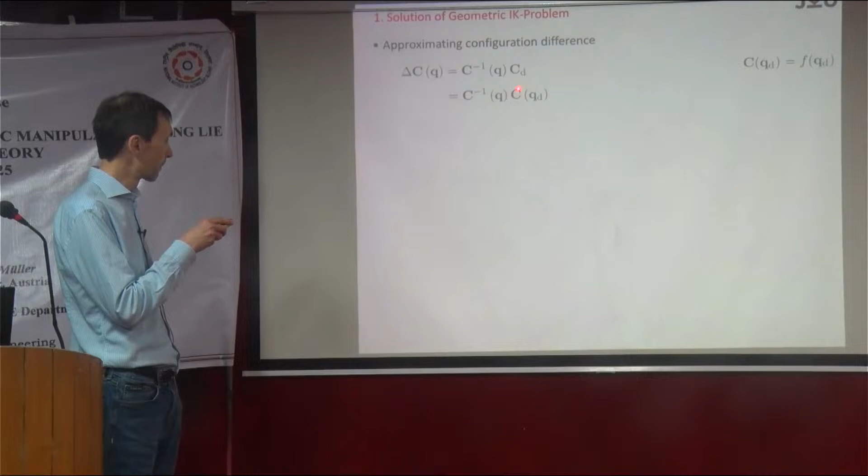Okay, yes. Okay, and there we go. Because once you have this delta C, you can actually proceed and say, okay, so this is delta C, right? So this is my current, so C of Q is my current configuration according to where I start, like some joint angles, and CD, this is given.

What I would like to achieve is that I can express this desired by a certain yet unknown QD, right? So I say, okay, there is a QD so that it gives me CD, but I don't know it. But anyway, this is correct. And then I say, okay, this QD is, as we said, just this Q where I start from plus an offset, and the offset I need to compute.

And now what you do is, again, a Taylor expansion, right? So what you do is like saying, okay, C inverse, of course, times, where am I now? So you expand this in a Taylor series at the point Q, and you truncate this after the first order, right? So just take the first partial derivative, because the Taylor expansion would go to infinity. And if you take a Taylor expansion of a matrix or any function that depends on a vector, it's the sum of the partials times delta Q.

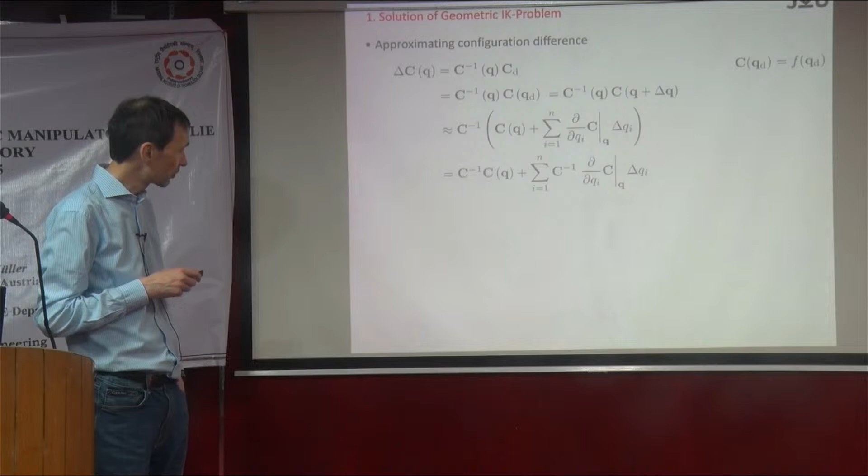Yep, and there we are. So what's the difference here? Oh yeah, so then we can maybe multiply this out. So this is C inverse and so on. Yeah, and there we are. Because what is this? So C, here should be CQ, of course. So CQ inverse times CQ is the identity matrix, and what you're left with is this one. Now this was actually the definition of the Jacobian, of the forward kinematic Jacobian.

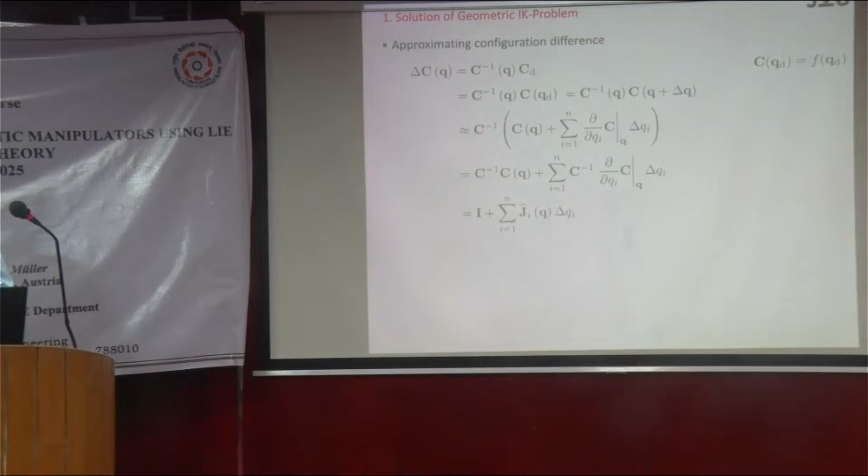What about time? Yeah, because maybe I'll go into detail after the lunch. Yeah, then let's have a bit of a break.